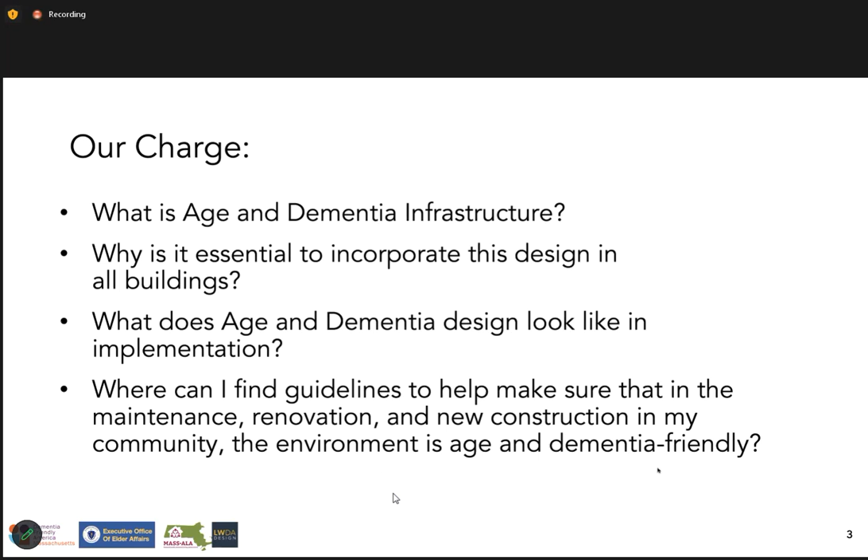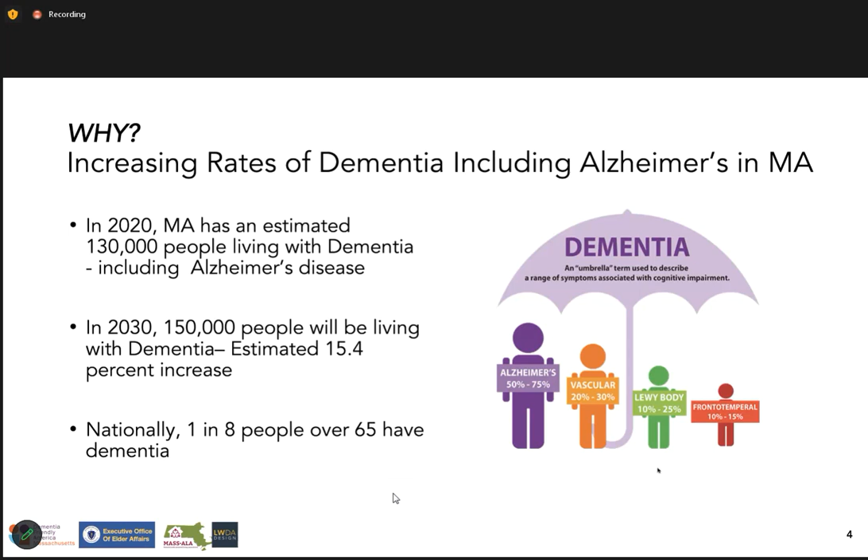I'm Ruth Neiman, and what I do 105% of my time is focus on environments that are supportive and friendly without looking or feeling institutional or clinical.

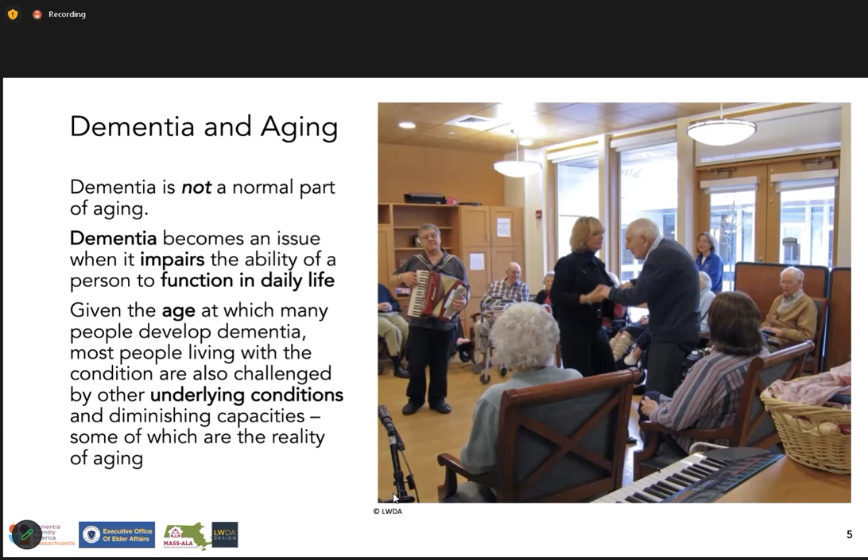In general, we all know that dementia is not a normal part of aging. It just happens to be a symptom of diseases that are more common or prevalent with the elderly. And what makes life even more difficult is that with age and dementia, there are other underlying debilitating situations that make it more difficult to find yourself in the environment. So dementia becomes an issue when it impairs the ability to function normally, to do the daily life activities and enjoy life. People are dealing with diminished vision, diminished balance, diminished hearing, and on top of that, issues with cognitive impairment, and that makes the situation even more problematic.

And the way we think about it, even if we design a housing project for the market rate, we always think about these features that make the design better.

So what is the environment? It's basically what we hear, touch, walk, smell, and everything that envelops us makes the environment in which we live. And the environment, in order...

In order to be friendly, it needs to provide physical and cognitive support. Physical support, very easy: handrails where needed, benches for rest where needed, flat surfaces without tripping hazards.

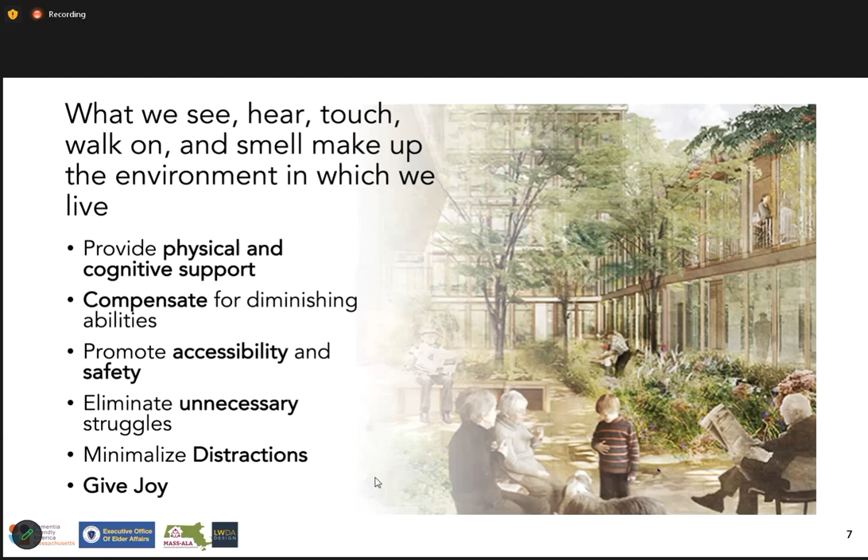So the goal of dementia-friendly environments is, in general, improving the quality of life and having people maintain their abilities and independence and dignity as long as possible.

So people come to our communities with lots of history and stories and passions and wishes. And what we do with the environment, we want to sustain their identity and make it possible and enable them to continue with what they love to do.

Compensate for decreasing abilities, as we talked about, and present manageable choices. When you have to make a choice of where to go, it is very important to know that even if you make a mistake, it's not critical or it's not uncorrectable.

And maintain the normal. It is true that when moving to an assisted living community, people are changing a lot. They move to a new environment, they meet new people, but they also have their normal routines and things they love to do.

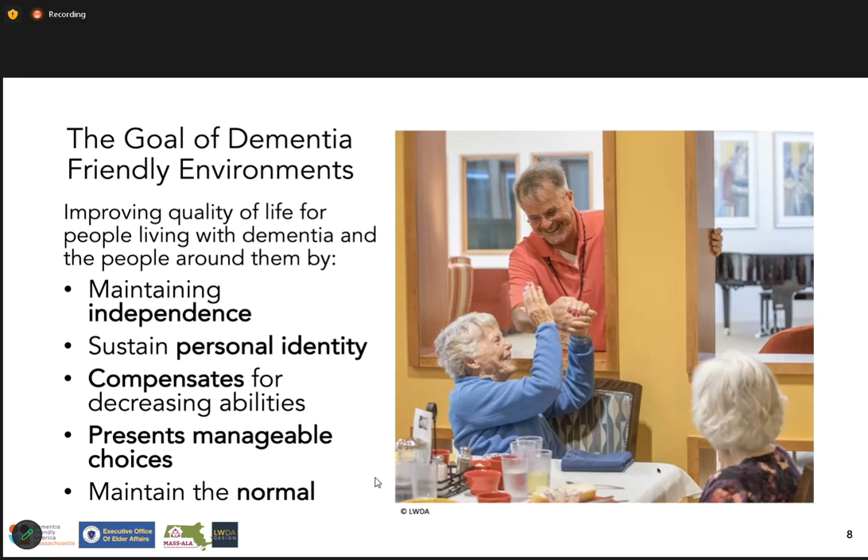And maintaining that normal for people again makes them function better. So, Ruth, just to jump in, as you go through these bullet points on the previous two slides, those are all principles of just good inclusive design, as you said.

Absolutely. So you shouldn't look at the things we're going to go through and say, oh, that's dementia-friendly design. It's just good design that's more inclusive. But as Ruth continues, you'll see some things about what not to do. This is something I always emphasize, that these are not things that are just dementia friendly. No, this is just gorgeous, and familiar.

The characteristics we work on are familiarity, and being regionally and culturally appropriate. We're not going to do Spanish Adobe style buildings in New England, but maybe they are really appropriate in New Mexico. So we think about what people are coming from, what they've known for years, and keep that familiarity. The places should be self-explanatory.

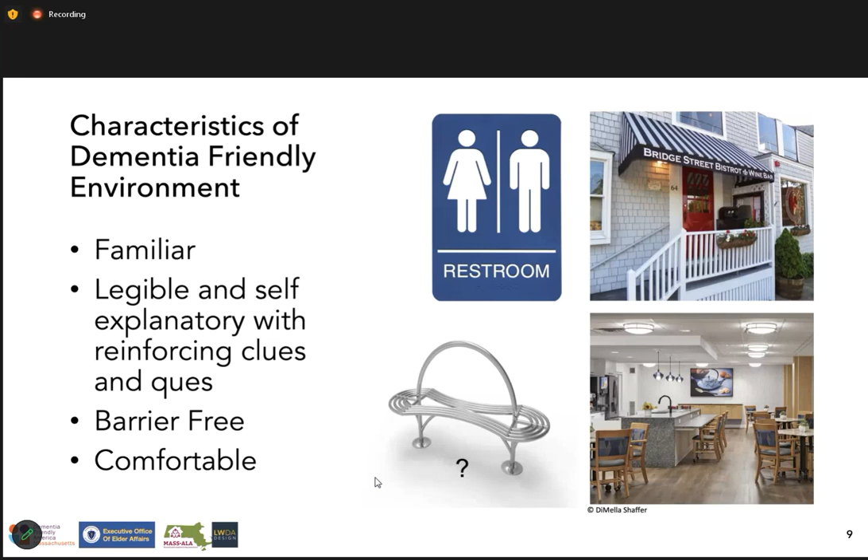So it's not only not human-friendly or dementia-friendly because you can't figure out what it is, it's really uncomfortable. This is really not a back, there are no arms, there's no comfortable place to sit. The first time I saw it, I said, it's not just not dementia friendly, it's not even bum friendly. So that's the point.

More characteristics: calm and uncluttered. This checkout counter for a library is a little bit cluttered here, but very clear what it is. It has good color enunciation, a sign, an open counter, and a kind of welcoming person. That is very self-explanatory of what it is.

This is a dining area in an assisted living for dementia community in San Antonio, Texas. It used to have a closed kitchen with a door and lock on it, and was less bright. The renovations opened it up, made it clear what it is, made it possible to communicate and assist in meal preparation, and also did a lot of work on lighting and daylighting to create these spaces.

This is another example from the same community where things are well and evenly lit and friendly. Even what looks like the attendant or nurse's station looks non-institutional or non-distracting. And another community has a great room with, if you can see, acoustical treatment even on the cathedral ceiling.

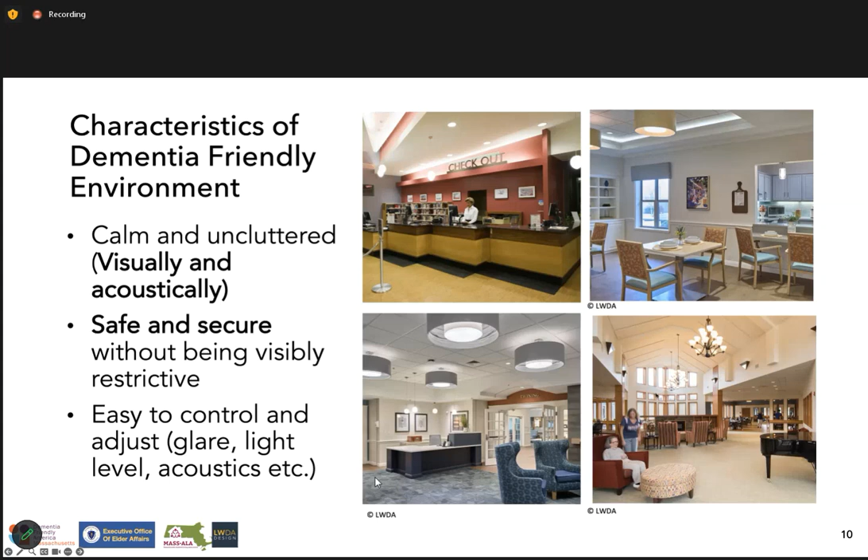Okay. Why does it not want to advance? Okay.

One thing you'll get in follow up to this, or you may have gotten already from Christina, is the actual guide our group put together. This is the Age and Dementia Friendly Design Considerations for Physical Infrastructure. We've been promoting and elevating this since we released it in September 2022.

You'll see some of the sections we'll go through. Ruth will emphasize the sections we feel are most applicable to assisted living, but really these principles and themes carry through communities. You can see the 4 major categories we touched on. This is based on literature we found, other examples from around the world, from Ruth's work and her colleagues in the architectural space, and from our regional planning partners. This is the way we broke things down.

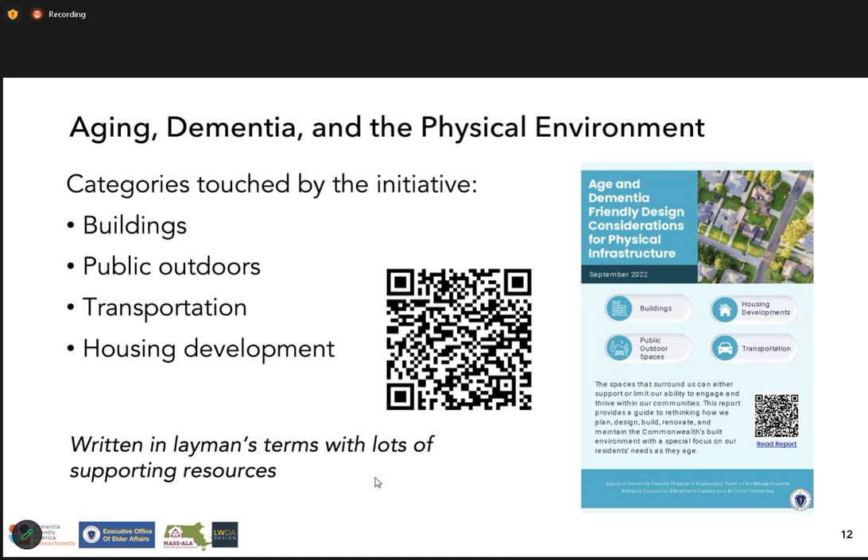There's a QR code here, but you'll also get the actual guide in follow up, and you have our contact information as well if you have further questions after this. So you don't have to feel like you need to flash up your phone here and go for it—you'll get everything in follow up.

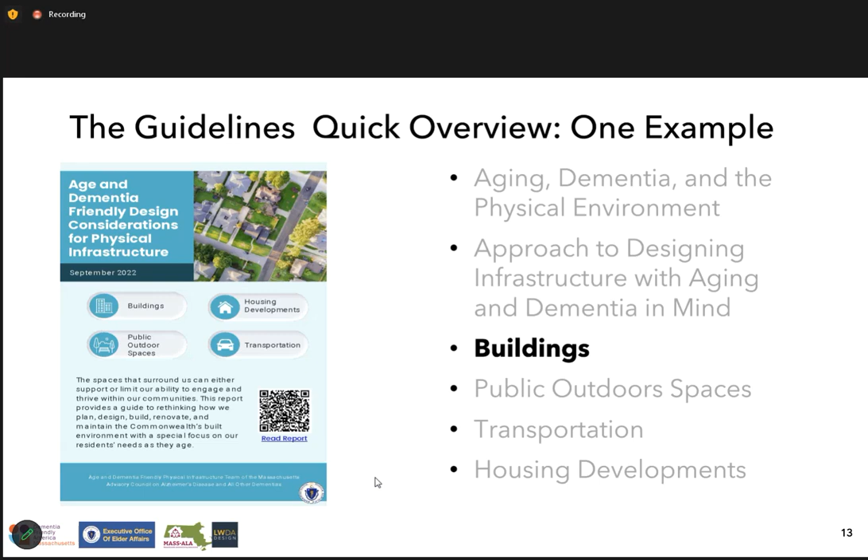What we're going to focus on today is buildings, but there are other things that might be applicable to your work, including outdoor spaces—if you have outdoor space at your residence that's open to the public, that may be something to think about. Also transportation, and connections to the broader community from your residents. I skipped over the first 2 bullets, which are context setting about the setup and background to this work and where it came from, but happy to answer questions when we're done and follow up.

So now is the fun part, with Ruth getting into buildings. Go ahead, Ruth. Okay, so we were debating whether we should keep this beautiful blue sky image of the Boston City Hall on the slide, and decided, okay, let's keep it as what not to do.

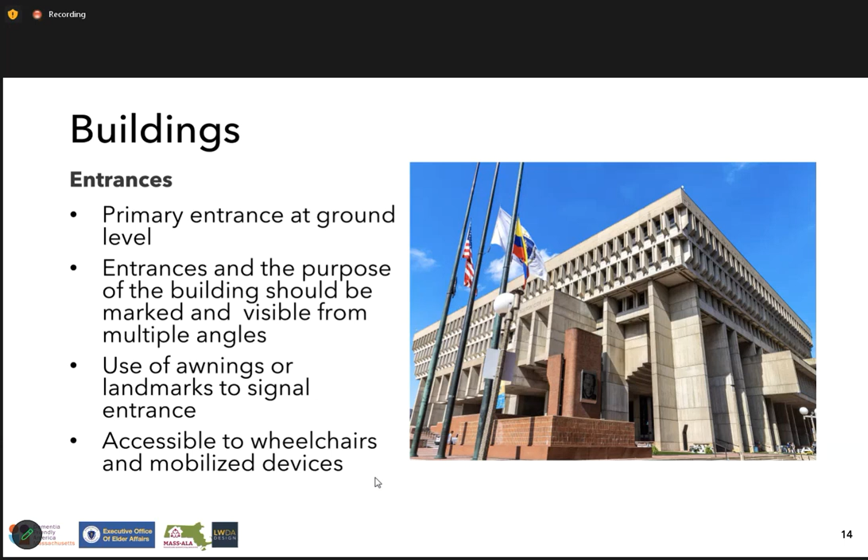Because the Boston City Hall has been an enigma for a lot of people. How do I get in? Am I on the 3rd floor? Do I need to go down? Do I need to go up? Where is the entrance? What is this thing? Is this the entrance? So the entrance really, even though this building is straddling 2 levels, should be very, very clear and obvious.

And there are ways to do it. Some of them are architectural, like awnings or colors or signage. Usually signage is almost the supportive method of helping orientation—if the building itself or the architecture doesn't tell the story, then the sign has to. This says Boston City Hall, but this is really not the main entrance. So awnings and landmarks, and obviously the entrances have to be accessible to wheelchairs and mobility devices, and easy to operate, clear, and not sending you to the back of the building to a ramp near the loading dock.

Entryways, again, obvious. A lot of times we're talking about a very simple device which allows people to avoid struggling with doors - an automatic opener or assist opener. Having the door open automatically every time a dog walks by is not a great idea, so power assist is usually our choice. People who can operate the door, and people who need assistance or don't want to touch anything, can hit the button with their elbow.

So no excessive pressure. Exterior doors are known for being challenging because of winds outside, and there's a very clear level of force in the code that's allowed for a door to be considered accessible. Everything needs to be visible, not hidden somewhere else. And you need enough protected space in front of the door so you can position yourself, for instance if you have to push a button for an intercom, so you're not outside in the elements. Non-slip and obstruction-free is one of those things we always forget to mention because it's so obvious.

Handrails - I am really an advocate of using handrails almost as an enhancing trim piece, as opposed to making it look very institutional. I also have this pet peeve: if you do handrails, do them on both sides. What do you mean by a handrail on one side? People go and then they have to come back, and if their strong or supportive side is right, you don't want them to have to go and lean with the left. I've seen so many places where they say we don't need handrails, we'll do lean rails, and only do one side. Why? This is something I'd really recommend thinking about.

Wayfinding - this is again a piece of our report that talks about wayfinding. As I said before, good signage, shown here as an example, has good size text, a pictogram that helps you understand what it is, and good contrast between the information and the background. In the accessibility code there's actually a very clear distinction for what that contrast needs to be, because if you want to be cute and do dark beige on light beige, that won't work. In my view, signage is helpful and important, but it's almost in the category of a crutch, because the space itself, the way it's designed, the marks in the space, and the daylight should be giving you a clue to where you are.

Just to emphasize, in our research, some folks with dementia will recognize icons, not text, or text not icons, or need the combination to put those pieces together. In the broader community, icons like the stairs icon or trash icon are also just good community design anyway, if you don't speak or read English, so you can identify things in public buildings and spaces.

Now we're going to more practical information, the implementation of those guidelines and principles. There are three main categories: maintenance of your building, like ongoing refreshing; renovations that are heavier, changing spaces and uses; and new construction. The fortunate few have the blank slate of new construction, but I'd guess most people on this call are doing maintenance or thinking about renovations.

This is an example of a memory care layout with a lot of good features. It's a small house, which everybody is trying to either go towards or renovate their spaces to create small social groups. Here you have great reliance on daylight and views in the main common area, and a courtyard in the middle which is absolutely safe because it doesn't go anywhere. You can leave these doors open, there's a glass door wall around it, definitely in good weather.

The common areas are kind of in the middle. You can see an open kitchen that will explain the use of this space, and the spaces are kind of open. Very simple building typology. You don't have a lot of forks in the road where you have to make a decision - if I go right, do I get lost? So this is an example of simple circulation.

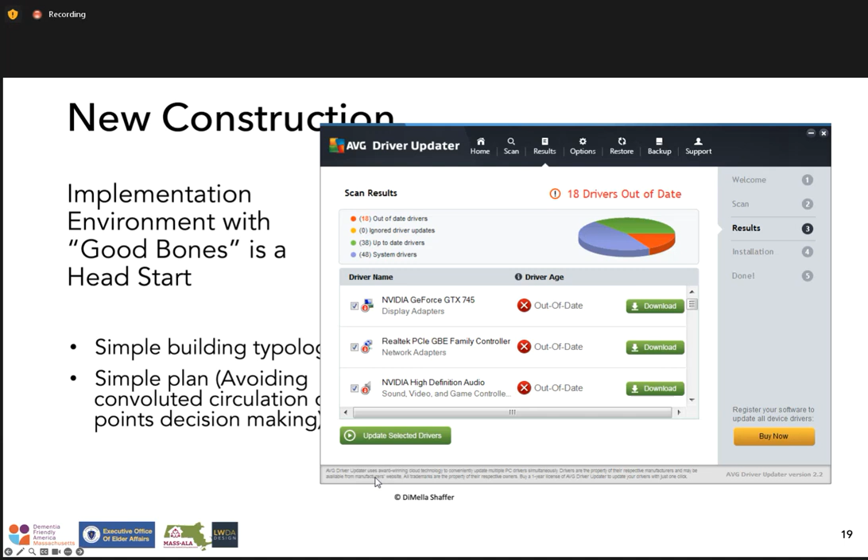This is actually a photograph of a dementia or memory care community that implemented these choices. The common serving kitchen is open, it's very clear what it is. It also has a small room behind it where more commercial looking aspects are, like the ice machine that people don't usually have at home. The idea is to make the environment, even though it's not a single family home and there's a larger group of people living here, feel more homey and familiar.

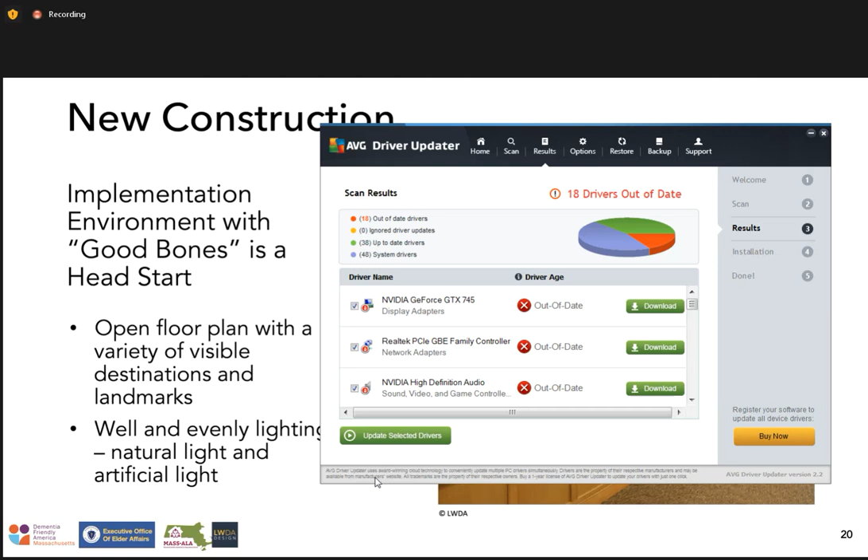Stainless steel appliances are behind the closed door. Then there's this completely surrounded courtyard that provides daylight to the dining area, to an activity room on the other side, and to all the corridors around, so from wherever you are, you really know where you are. You come out of your room and the reddish, brickish color invites you towards the dining area, along with the good food odors and the clinking of silverware - you know something good is happening. You can see the place is flooded with daylight, but also in the evenings there's plenty of controllable lighting circuits, with dimmers or different circuits, so you can make the lighting as bright or as dim as needed.

When you do renovations, there's also a lot you can do. You can see how this project in a corridor of a senior living building, I think independent living, used colors to emphasize the doors that are resident apartments, and de-emphasize doors that are janitor's closets or utility closets not accessible to residents. You can see the choice of non-glossy floor, and they wanted a bit of decoration on the floor, so they chose two colors that are not too contrasty, so there's not a situation where people may be afraid to step on the darker area.

This is a new building, again a memory care community with a small house or Green House concept, where this is a lobby in front of the front entrance door to one of the Green Houses. It has all the features of a front door, like a mailbox and a sitting area in front of the elevator.

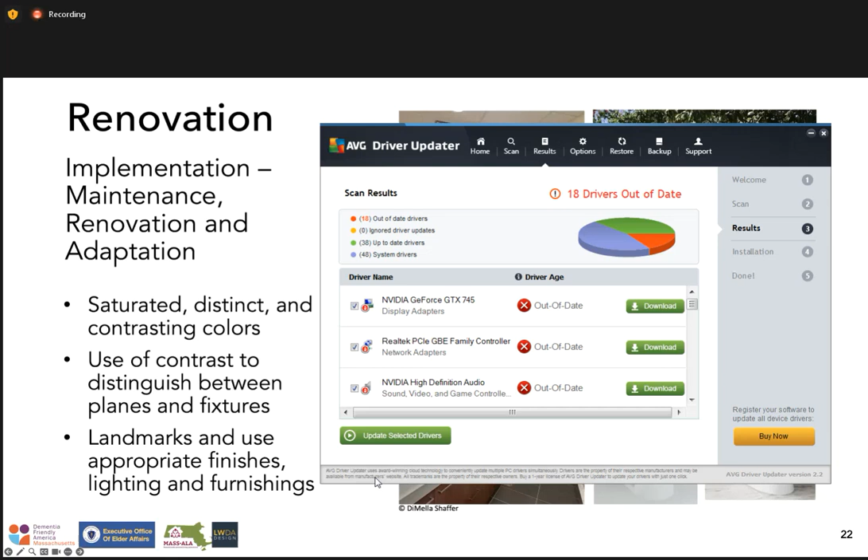Another example of renovation that used colors and more clues and cues that tell you what this is. This is a very nice breakfast room, I think in Orchard Cove by DiMella Shaffer. And these two images, I really like to show them one next to the other because it's the same space before and after. This is a memory support community in San Antonio, Texas.

For some inexplicable reason, the original design chose to use columns to separate the corridor from the main activity room, and only a few of these columns are structural. So what we did was eliminate these columns, create another kind of separation that is not hiding what's going on, and replaced all the institutional looking lighting with a lot of decorative and bright lighting. The difference between these two spaces is really unmeasurable.

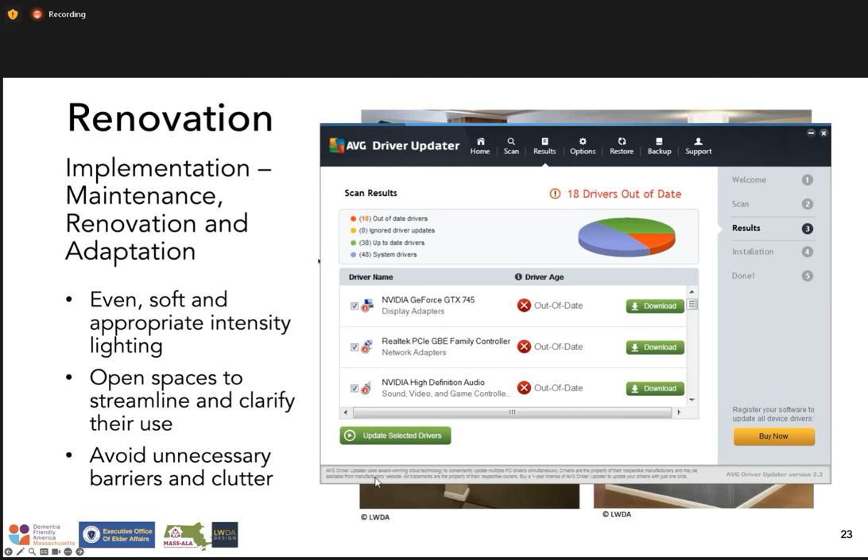Furnishings. So you have seen some of these images before. Furnishings, again, is something that you in assisted living communities have the ability to review, change and redesign, and making the right choice is most of the time cost neutral.

If you're looking at these dining tables, I think this would be almost preaching to the choir, but obviously they're comfortable with arms, the correct height, and some of them have casters in the front and just sliders in the back, so the chair cannot completely slide, but it's easy to move and get yourself positioned comfortably at the table.

The space advertises its use, and everything is durable and cleanable. I'm sure nobody looks at this chair and says, oh, it's an institutional chair. The seat is made out of a vinyl material, and the back is fabric, and it's easy to clean because it has that opening between the seat and the back. The use of color that is all from the same family doesn't scream 'we are protective seats,' which makes this look really residential.

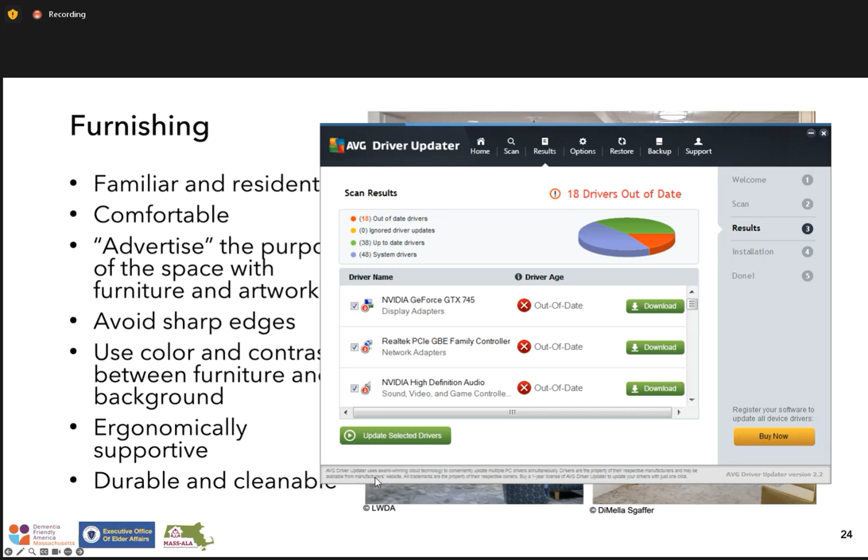Outdoors - hopefully all of you have safe and inviting outdoors. This is an outdoor courtyard in a memory care skilled nursing facility, and we used the warmth of the cedar wood as something that makes this almost like an outdoors room. Because, yeah, it's a fence, but does it look like a fence?

No, it looks like a very good looking wall to this exterior room. Some of the areas have handrails that you can lean on. We try to separate, even though not on both sides, the planting area from the walking or wheeling area, so that you're not inadvertently falling over the edge. Lots of seating, comfortable seating, seating with arms.

When you are in this space, the egress door is really not accentuated and it's not very clear. It's also protected by electronic locking that only releases in case of an emergency. But the two entrances to the courtyard are very, very clear and visible - not from the angle of this photograph, but if you're outside, you're not lost. You know where you came from and how to get back.

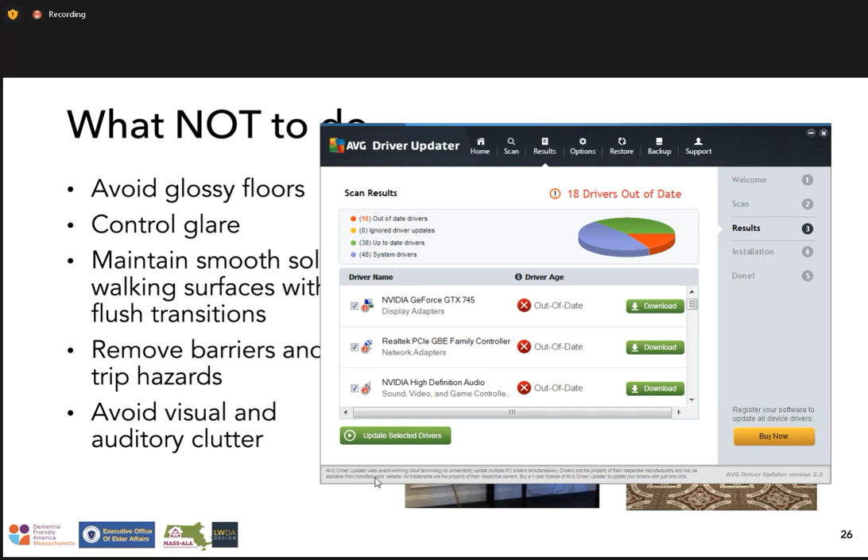And then the lighting is very spotty, so you walk from very bright to darker to bright to dark. The floor finish is not that bad because it's not like a black and white checkerboard, but the patches of light are a problem. You have to think about even lighting, not up and down, up and down.

Lighting manufacturers or lighting vendors, before they sell you lighting fixtures, will give you the service of doing a photometric calculation and overlay it over the plan, and then you can see very clearly the intensity of light and whether it's sufficient and whether it's even.

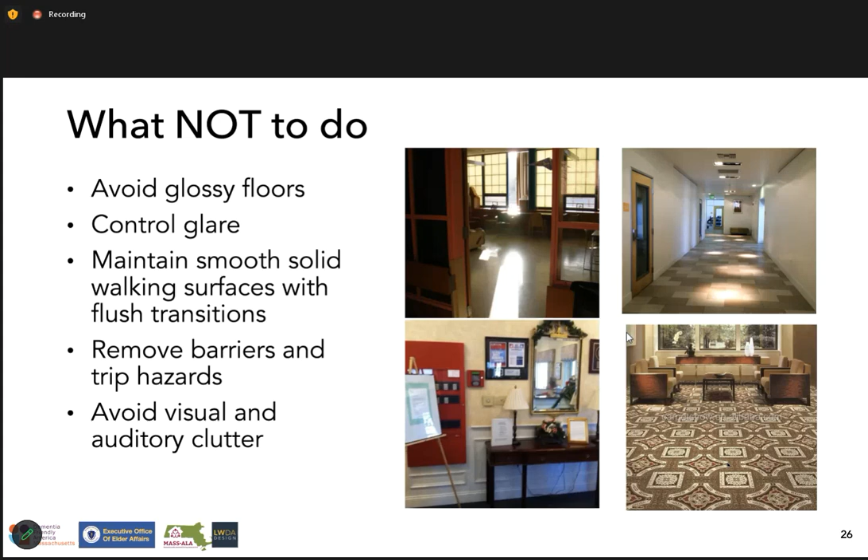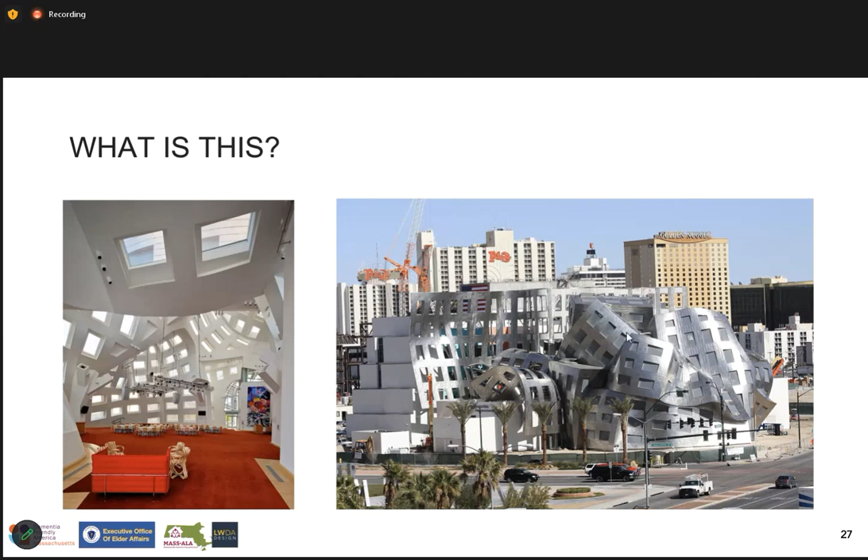That takes me to my last slide before questions and answers. Since everybody is muted, I cannot ask you what you think this building is. It is designed by one of the star architects, and it is in Las Vegas. This is what it is: Center for Brain Health in Las Vegas.

So this place has clinics, and they care for ambulatory patients. There's no sleeping in that building, but somebody has to get close to this building in order to see their therapist or doctor for brain or dementia situations.